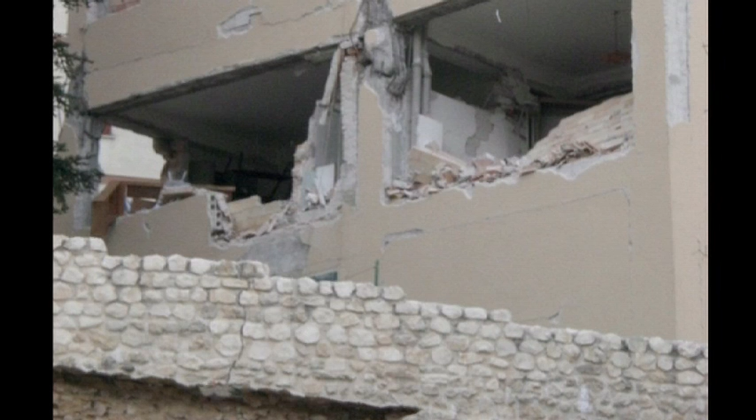Then, unfortunately, in 2009, my country—I didn't tell you, for some reason someone convinced the Queen to accept my citizenship application, so I became a Kiwi Italian now. My kids were born here, so I have two countries now. Italy, and this country, have both been affected within two years by severe earthquakes. The L'Aquila earthquake—someone may have heard of L'Aquila—was something that could help, and can still help, in understanding a lot of what happened here.

Just to give you a bit of analogy: we came back from that earthquake, and I decided to spend more time on it during my sabbatical year. We came back telling people there was something absolutely unusual—a main city, maybe this will ring a bell, déjà vu, a main city struck by an earthquake with its epicenter just underneath the cathedral. That gave a huge punch into the medieval center, with a vertical acceleration that was so high. Does that ring a bell?

And people said, it doesn't make any sense, we don't have vertical acceleration, we have an alpine fault far away, there's no way we can have vertical acceleration. And I'm sorry for your country, we understand, but you're dealing with structures over there which are old unreinforced masonry, very vulnerable. And I would say, yes, but that's not correct.

We do have in Italy many reinforced concrete buildings which are similar to the ones in Turkey, or similar to the ones in the US, Japan, California - in California they think there are more than the US, Canada, South America, and New Zealand. For how good New Zealand was in 1960, 70, 80, 90 in earthquake engineering, I'm going to show you that this is nothing different.

And now, unfortunately, we had the confirmation. So 2010 came, September the 4th, and that was bad news, and that was good news. That was half a story of success. It was half a wake-up call.

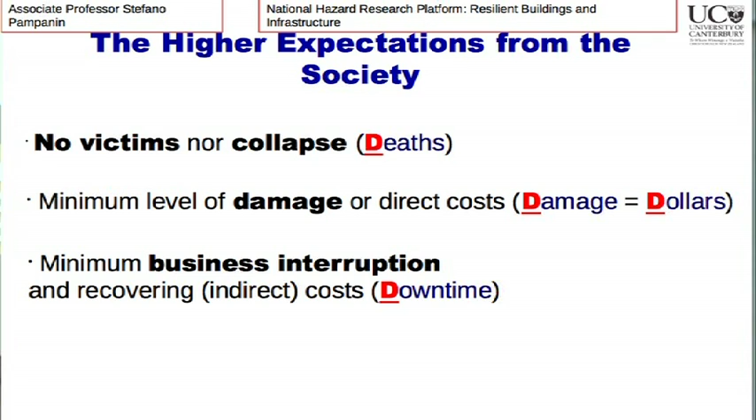But then you're asking for something more - you're asking to have basically no business interruption. And everyone thinks that in a modern country like New Zealand, we should be able to give that to the population. So how come that in best international practice and current best codes in the world - New Zealand is among the top 4, which are US, Europe, Japan, and New Zealand, considered the 4 best codes in the world for earthquake engineering?

Now let me tell you something that probably no one has actually communicated to you - the truth. The truth is, in international code, there's a sort of implied agreement with society, with you people. You were part of that agreement somehow, and I will try to explain how. When you get a big earthquake - and this is the big one, frequent earthquake - it's going to happen every 43 years.

So basically it's going to happen. It's a probability, but it's a small type of shaking that you're going to feel in Wellington any time, sometimes over here from Milford Sound. You would like to have a green tag.

We're going to disclose this magic thing of the green tag. The green tag means, basically, with a moderate earthquake, you're expecting a fully operational building, so you're able to go back to your building without too much trouble, keep on working.

As soon as the earthquake becomes a little bit bigger - something which is going to happen with less frequency or less probability - then you're going to have a little bit of trouble. Some damage, still operational, so you're still able for a few days out of your office, out of your house - this is a yellow type of damage.

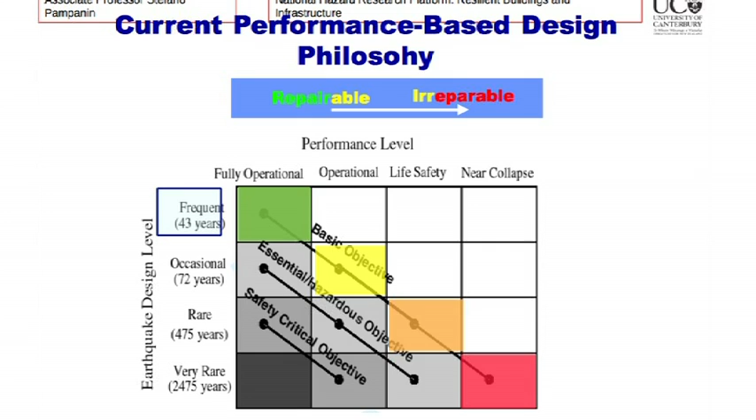So now you understand tagging, and that under a decent earthquake, the level of protection the code gives you is repairable yellow, irreparable heavy yellow - basically a not-repairable building under a severe level of shaking, which was mostly between September and February. That's the reality of facts, unless we do something else.

Now, the fallacy: the code is not a target, the code is not the goal. We must not accept someone proposing the minimum standard, like when you're shopping around for anything else. You must know about better performance, new products, what is available - and today we're going to tell you something which can do much better. The code is actually minimum by law. If you go lower than that, you're illegal. So why are we accepting just that level up, the legality, can you say that? Or why don't we just do a little bit better and ask for a much higher level of performance?

Now, the bad news, or the truth, is that by definition, what all of us thought about being earthquake-proof doesn't mean earthquake-proof. What you thought was an earthquake-designed structure - one where you could have a nice shaking, go check whether the magnitude caused liquefaction or not, come back to your house and be safe - doesn't exist.

Sorry, or it does exist, but it's not what you bought. What you bought is something which is earthquake-proof enough not to collapse, but to be severely damaged such that it's irreparable. This is unfortunately the truth, provided that you're going to stay on the minimum required by law.

No one is telling you that you can't raise the bar. We're going to discuss that.

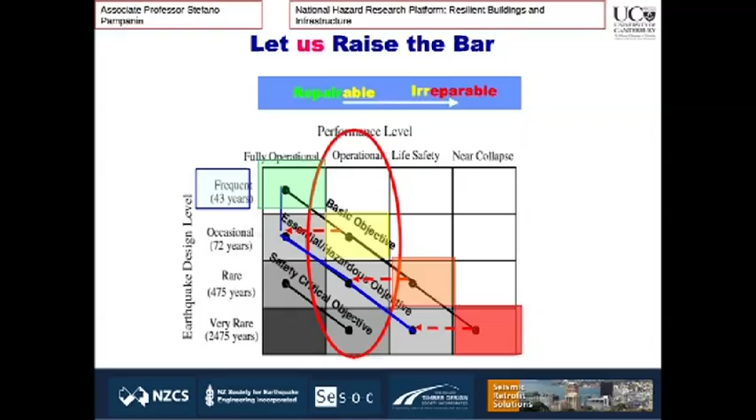Basically, it's shifting. Instead of being down here, up there, we are actually coming with a level which is a little bit better, and you can change that level.

You can ask someone, sorry, I like that car, but how much does it cost to just get a better one? And they're going to tell you, oh, you got me, actually I was trying to give you the old stock that I had, and now that you caught me, there's actually better technology that I have to sell you for 30% discount.

So this is something that does happen, and we're going to discuss how building technology has changed and how it was in the past. So just believe us when we tell you that the famous 1970 is a milestone, is actually a threshold in changes in the way of designing buildings. And that was 1970, ages ago, so something of the same nature should have happened.

That type of revolution happened in the 1960s, 1970s, and it did happen at Canterbury University. It did happen in New Zealand. New Zealand was leading the world, telling that if you have a chain, and basically a building is a chain, you are going to have, by definition, a weak link. There's going to be something that the earthquake is going to find.

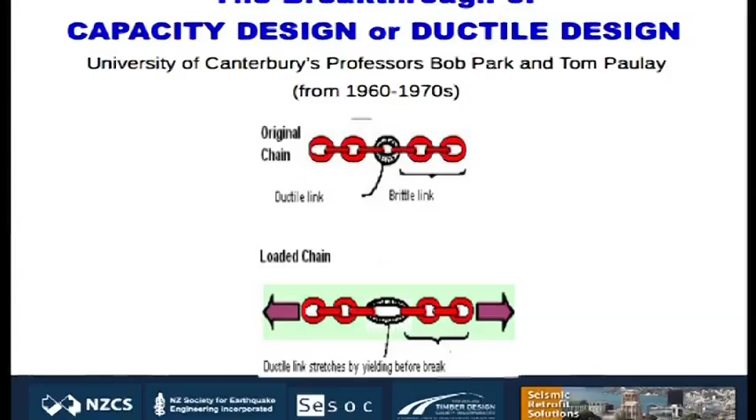That's part of the nature of finding minimum energy to just go through. So there is something in our body that is a weak link. If we can make that weak link ductile instead of brittle... my weak link, I have ankles and knees, very, very brittle. I broke them so many times. So when I was going to the doctor, I was asking, can you please put a ductile ankle? What the heck are you talking about?

I would like to have something which is replaceable. As soon as I knock it in, my swelling is going to disappear immediately, and I'm going to have a replaceable ankle. Can you provide it to us? So the point is that if we could make the weakest link ductile, this is going to at least preserve us from fracture.

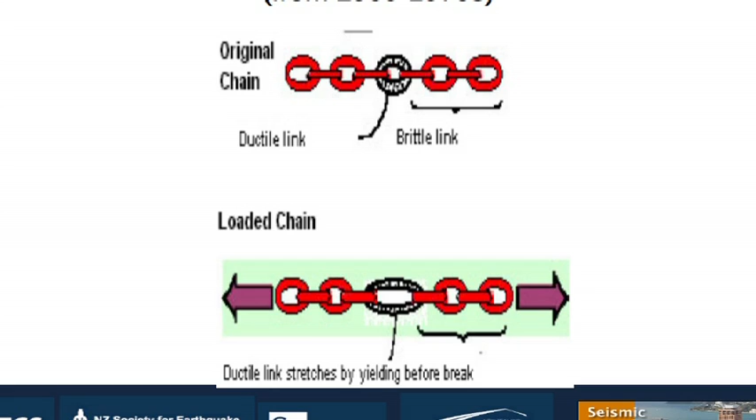And that was the revolution in 1970 in New Zealand, where Professor Park and Paulay suggested that we design the weak link to be where we want. I would like to have the weak link over here, and I'm going to work hard to make the connection between the two elements as ductile as possible, something which can stretch nicely without breaking in a brittle manner.

So the novelty was ductility versus brittleness, and everyone understands brittleness. Glass is hard. If you go over the strength, you're going to fail in a brittle manner. It doesn't matter how hard it is. There's always going to be, by definition, a bigger earthquake than what we thought, and that unfortunately happened.

That's why disasters happened, because there's always going to be something we did not know. So the best way of protecting us from the unknown is to have a backup plan, which gives us the possibility to go further instead of collapsing under a bigger than expected earthquake. This is what's been taught in the world since the 1960s-70s, called capacity design, which means if you do not decide to have a ductile mechanism, this is going to be your ankle breaking up over here, breaking up over there, which causes columns breaking badly and causes a collapse. This was the design philosophy until the 1970s.

So anything designed before that was very prone, and is still very prone, to this type of collapse. We've seen these collapses everywhere in the world. The new revolutionary way in 1960-1970, which entered building codes around the world in the mid-70s, was to place ductility where we wanted, such that our building can actually sway quite nicely without collapsing.

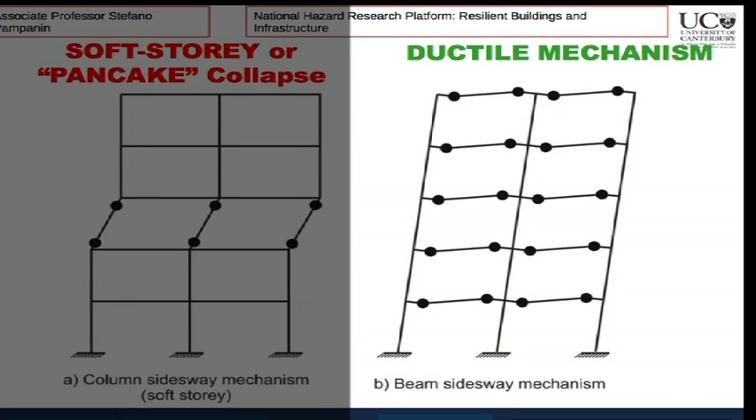How can you spot it? If you see something with strong legs and small beams, good, approximately. If you see something with slender legs and a big body on top, that's basically this type of configuration, and it's a problem.

It's not that complicated, but imagine that in the 1950s-60s, the best engineers did not know enough to understand this type of situation. So at that time, they were doing their best up to what they knew. And this example shows the issue of design standards in the world and in New Zealand.

New Zealand was very good at improving and promoting new design standards every 10 years. Just imagine, from a revolutionary approach able to preserve a building from collapsing suddenly, then from there on, every 10 years, 1982, 1995, 2006, and now there's going to be a new code, things have been dramatically improved.

What does it mean? Just imagine how much we would smile looking at Formula One. Obviously I'm biased, so I think Ferrari is still the best car in the world. The 1960 Ferrari was absolutely fascinating, wasn't it? It was the best car, the fastest one. In the 1970s, wow, the evolution in 10 years was unbelievable. 1980, unbelievable. Now in 2011, looking back at those 1960s and 70s, we are smiling. They did not know. Look at that. They were still using...

Think about our cars - can you believe it, they did not know about seat belts or proper braking. Imagine what that means in terms of technology over 10, 20, 30 years of evolution. Believe us, if codes have changed every 10 years in New Zealand, you're having a major improvement. In 50 years from now, people will look back thinking, can you believe it, they didn't know that they'd be looking at our 2010 technology like an older type of technology.

You can recognize the building - I prefer not to mention it, but it's quite clear. I've been giving lectures around the world about precast concrete, and I still use this building to show how fantastic this technology was for precast concrete.

This technology gave you the possibility of going through an earthquake, which I'm going to show you how bad it was from an engineering point of view. And it did do the job it was meant to do - it developed these famous plastic hinges, a fuse within the body good enough that the building did not collapse and just needs to be repaired.

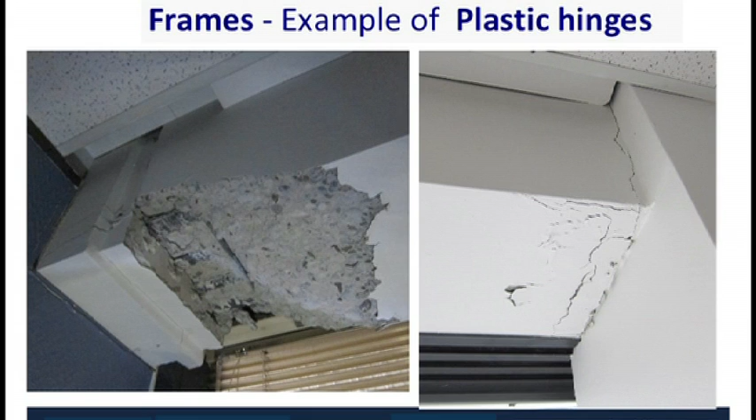If you consider that this earthquake was much stronger than what the building was designed for in 1980, this building did brilliantly. But there was a gap of communication - people did not understand, were not told, because you basically agreed that code means minimum standard and nothing else. So it did the job.

If you see what type of damage we get in a laboratory, this is nothing. This is absolutely okay - apart from some minor structural detailing I don't want to go into, in principle this is not a massive level of damage. Can it be repaired? Absolutely yes.

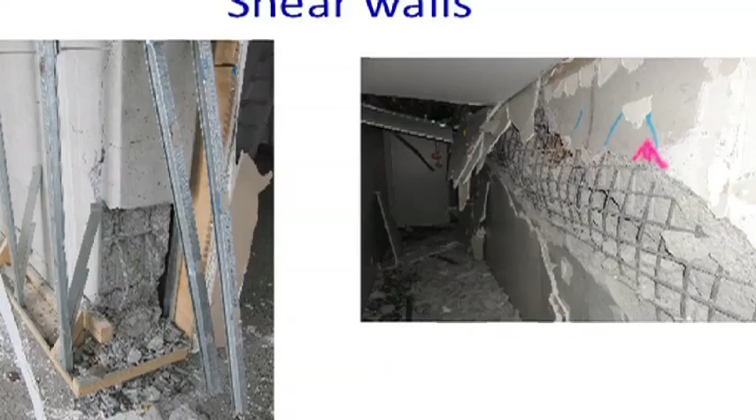Unfortunately, you have an insurance which gives you a full replacement. So what's the option - having a scratch on your car and being bothered going to the panel beater, or getting a new car? Get a new car. Back in Italy, we don't have that insurance, so we rely on the government, blaming them for not coming down with billions of dollars to repair our cars. They say we can't afford it, so I take the repair - I can go with the panel beater.

So these things that have happened are actually the way of dissipating energy through the fuse, avoiding the collapse as prepared.

I'm very happy we have someone from the press here today - because please, don't use magnitude anymore. Nonsense - I can take magnitude 9 in Milford Sound, and that's going to do not much. In Christchurch CBD, I can take magnitude 6 - I shouldn't say today, under our feet, not good luck, okay - but that's going to probably affect us more. The building counts the shaking it feels, not the magnitude.

So there's a way of communicating science which is important and fundamental. That's why we're proud and pleased to have the opportunity to talk to you, because you are going to be the ones making the revolution, not us. We're going to provide you the tools, but you need to be convinced the revolution can be made.

And so if you're being pushed up, you can imagine the building gets pushed up. Think in a different way. If you're skiing, that's the best example I can give. There's a lot of learning about vertical acceleration, which is a learning for the world, not only for us. If you're skiing and suddenly you go through a bump, you don't have time to jump. You go through the bump, your legs come up into your body, and you feel burning in your legs.

So you get the axial load on your legs before you have time to release and jump, right? That's what happened to the buildings. They got a bump. They were not skiing, they were just standing, and the piece came underneath, and they got pushed so heavily underneath that basically, suddenly...

Imagine more than 1G means - I'm quite a good unit for my students because I'm 100 kg. So I'm the unit. 100 kg is a unit. 100 kg in a square meter is a unit, 1 kPa. So it's quite simple for my students to remember how much is 1 kilopascal and 100 kg.

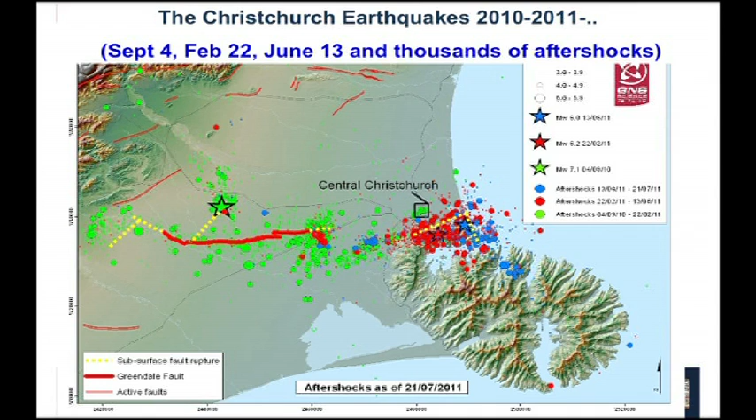I'm not going to break my ankle, but I'm going to sway it so much that if I'm not designed properly, I might collapse. But if I'm designed properly, I will not collapse, okay?

Now, the code is written in such a way. There's a nice curve, a fantastic mathematical equation, calibrated under thousands and thousands of records around the world. It's an envelope. There have been thousands of records around the world, starting in 1940 with the famous earthquake in El Centro, United States, where after that first record people have been plotting many of these graphs and taking an average. You understand where I'm going?

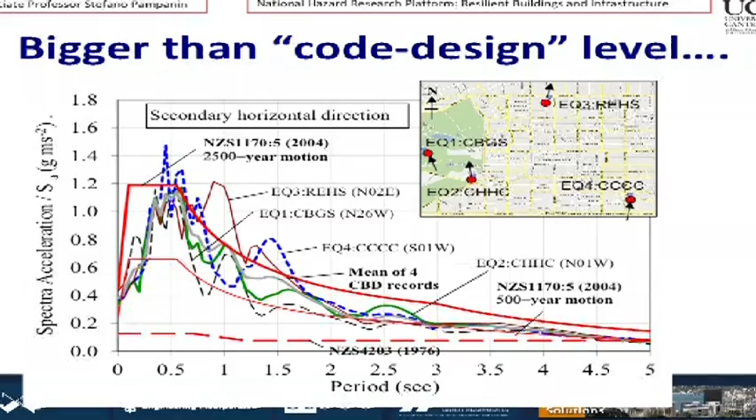Now that you know about that, you're going to wonder, hold on. Let me say it a different way. This is the 500 years earthquake. This is what you design for big damage, yellow to red, okay? You see that? This is where we are in the code. This is a 2004 design for big damage, irreparable.

Look at the earthquakes in the CBD. This is Hagley Park, where there are four recording stations, and that's what the building felt. That's what the building felt: 2 to 2.5, 3 times what was written in the code.

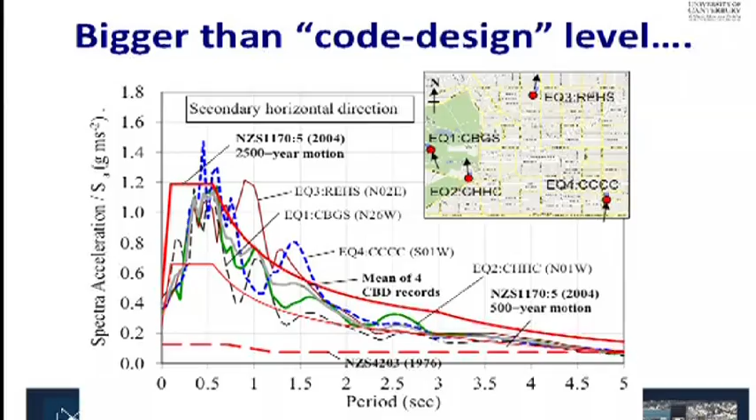Now, having said that, remember that for a new building you would expect for this type of earthquake very severe damage. And for this level up here, the famous 2,500 years, you would expect almost collapse. Are you surprised at what you've seen in town?

So the question is changing, and your brain starts changing in a different way. You're taking a 1960 car, 1970 car, 1980 car, and now you understand how much they were behind what we are doing today. You try to make a crash test, comparing the 1960, 70, 80, 90 car with, they say, the Volvo—not the Ferrari unfortunately—the most safe car under a crash test.

Okay, let's suppose that's the best target. You're having a crash test, but the difference is the crash test must be made at twice the speed of what you typically run it, because the earthquake was twice the speed. Would you be surprised to see big troubles in the old cars? No. You would actually say, how come, how lucky we were that not more of those cars could not preserve the lives of the pilot, wouldn't we?

And internationally, that's exactly what statistically has happened under such a severe level of shaking. The statistics would have suggested and predicted that Christchurch would have been flattened down, much more than what actually happened.

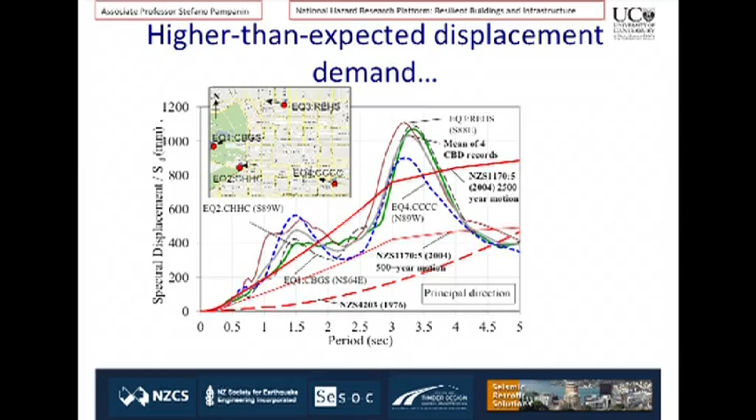So, having said that, let's move one step higher. This is displacement now, not acceleration anymore. We said tall buildings are going to be subjected to bigger displacement, but they're going to have less acceleration, that's good. But big displacement needs to be controlled.

That bump comes from different soil conditions, the fact that we are in a basin area, the fact that the earthquake is not going to fall exactly as expected, but just imagine the demand over there. Again, here's the code for 500 years. This is the displacement that a tower in the city center, any tall building, was expected to have—let's say 400 millimeters—and it became 1 meter.

Now, only if you're using the best technology, one of the best from yesterday, can you take it. If your building was designed according to something which was not able to give you that ductility, you cannot take it. So the message is straightforward: something so severely bigger than the best design we would do today obviously could have, should have, and did collapse or fail buildings which were not designed at that level.

One of the best quotes we've been using in earthquake engineering is from the late Professor Tom Paulay, and he taught the world that the earthquake does not read the code.

And however obvious it looks, the consequences of understanding that are huge in social terms, in terms of you not accepting anyone to sell you the minimum standard. You'll know that the next big earthquake, whenever it happens, won't respect the code. We'll have lows, highs, bumps, and those lows will not be there.

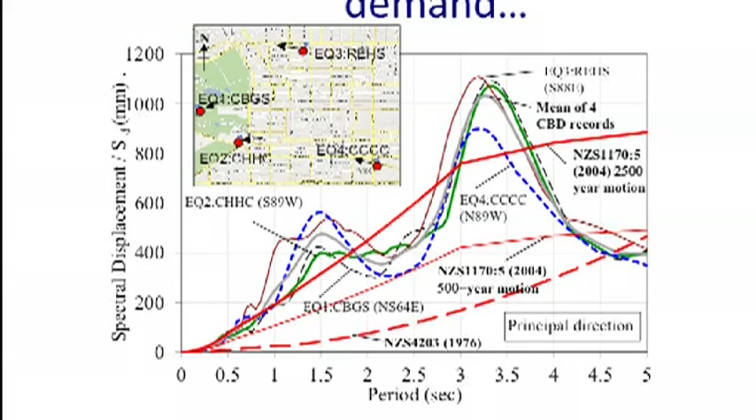The code will be respected in only one situation, which is something nice we like about talking to the seismologist. Over a decent window of time, not 50 years but 10,000 or 100,000 years, the whole amount of shaking the Canterbury region is going to be subjected to will probably fit that curve. That curve is a fantastic envelope for the seismology window, not the lifetime window.

Now that you understand that, your brain is going to change. Your way of discussing and asking for things is going to be dramatically different. That big building, that earthquake, did not read the code — it came with big bumps and lows. Even the lows were bigger than the 500-year design, so it was bad news no matter what type of building you were looking at.

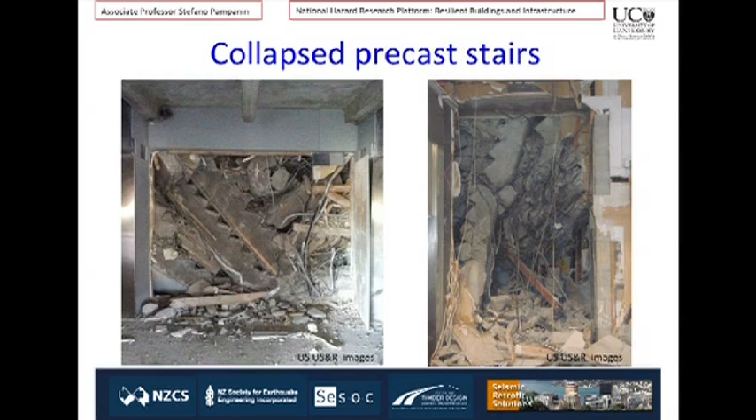Stairs collapsed, and that's something the world is now wondering about, because the design provisions for stairs in New Zealand aren't any different from what people are doing around the world. So there's now a quite severe problem globally of what can we do.

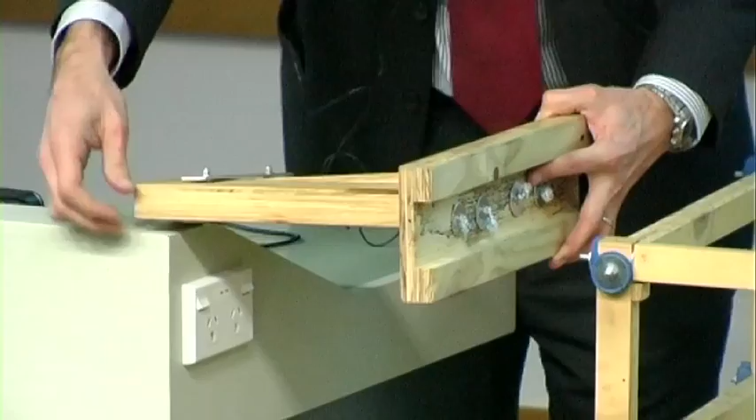And now it's quite clear — those stairs, in principle, seem quite simple, nothing else than elements sitting on top of the landing here and there, and the length of the seating, because of economy, can't be that much. How much displacement do you think the earthquake is going to push you for? You saw that displacement, how much it's going to push you. Take a coefficient of safety, think about the worst, and you get a certain number.

That was in 1980, knowing what people knew then about response of buildings. The same approach happens today, but now we know more about building response because there are different ways of doing laboratory testing and computer modeling, which I'll show you. So already by 2010, the prescriptions for how much a stair sits on the landing are bigger than what was done 30 years ago.

Makes sense. Still, the earthquake did not read the code — it came with displacement 2-3 times bigger than what was there, eating up all the coefficient of safety, and those stairs collapsed.

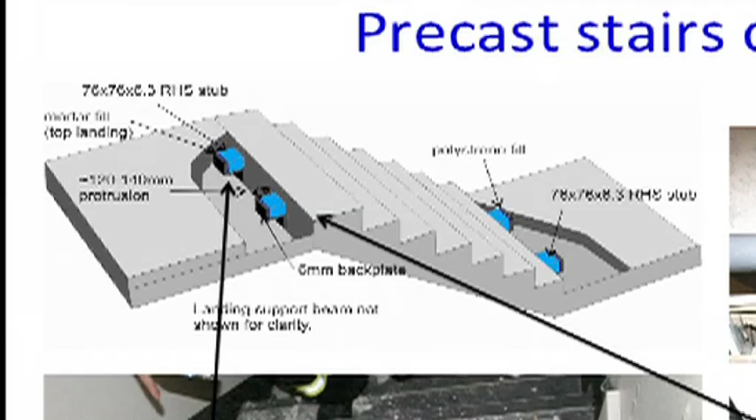Now here's something that's going to be, from a technical and social point of view, a revolution, and I'm personally pushing a lot for it. We're discussing again about building redundancy within a building. Redundancy means — let me tell you with a strong Italian accent — how much did you come out with? Make it like that. But that's not enough. It's still the same principle. After you make it like that, then give me a backup plan.

Should the stairs unseat, I want a backup plan, a catching frame. And I don't trust it — I want a third backup plan. I want a hanger that will hang my stairs onto something such that whatever happens, they're going to unseat, they're going to sit on a catch frame, the catch frame will not hold on, and they'll have a third backup plan.

Redundancy is going to be the new old way — it was the old way of designing structures. And this is going to be the message: stairs, if we can do something useful for society, will become the safest place you want to be, not the worst place you want to be during an earthquake. Wouldn't you expect that? The stairs being the place where you go and think, oh great, now I'm safe. How's it going?

Still moving. So we can do that — that's the point, we can do that. If you design the stair, and I'll give you an example so you understand what we're talking about, as a decoupled structure, disconnected from the mass of the floor, the stair becomes a self-standing structure with walls holding the stair only.

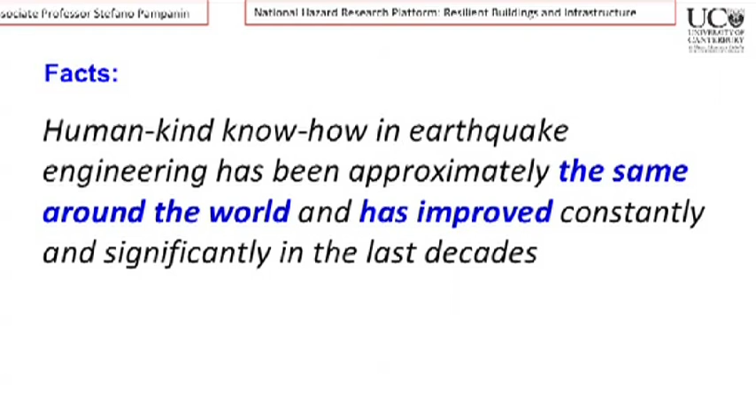A lot of things changed since 1994, not only since 1970. And then Europe got a massive problem in 1999. That problem was confirmed again by many, many earthquakes around the world.

From an engineer's point of view, which is what you're now becoming - you're going to receive ad honorem certification for this course - you see through. You don't see that building, you see the skeleton, the X-ray. You don't see my body - you're now going to see if my knee or my ankle are strong enough.

You see through, you start thinking the bone is good enough to take that loading. The legs are far enough apart to take the lateral loading. That's how we see things. And once you see through the skeleton - ooh, there are troubles over here.

Look here - the columns are bigger than the beams at this level, but as soon as you go up, the beams become bigger than the columns because it was mainly designed for gravity. So the columns become smaller and smaller going up the elevation, thinner and thinner, and you're going to get a pancake effect, not at the bottom, but typically at mid-height, on the top.

Plenty of earthquakes around the world showed a pancake collapse mechanism that caused a progressive collapse starting from the top, not from the bottom. These things are well known to be problems of pre-1970 design.

As we understand now, after the revolutionary design happened in 1970, it was like a 1976 or 1980 Ferrari - still far away from what we can do today. So no surprise that after a revolution happens, that revolution is still a past revolution. Something else has happened, and we need to do better.

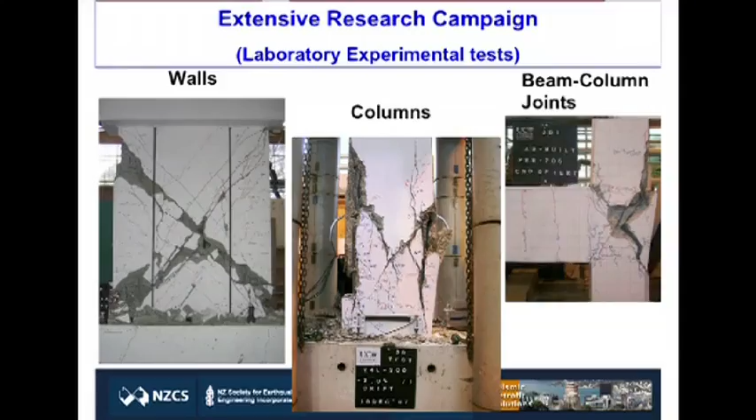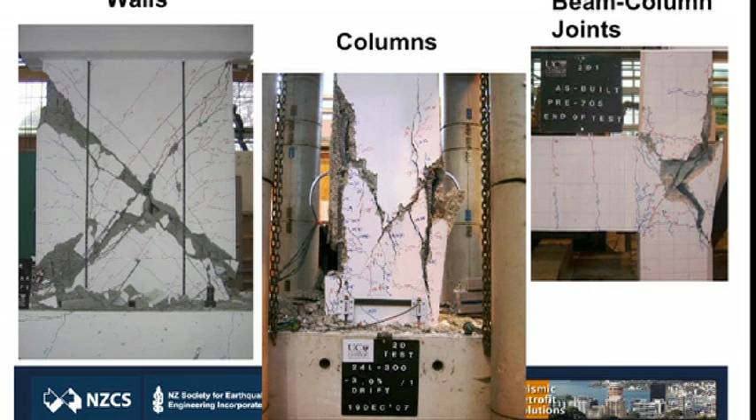The good news: this has been tested in the lab way, way before the earthquakes. These are walls according to New Zealand practice, old practice, and international practice - same thing. These are columns tested in the laboratory.

In 2007, interestingly, people said, 'oh, you were testing before the earthquake.' Yes, as a community we did not start on earthquake engineering just after September 4th. There was enough information in the world for at least a century - I'll show you there's actually much more than that to work with.

Now, the bad news is all these tests followed the principle that humankind had the same know-how in the 1950s, 60s, 70s, and 80s. We were testing New Zealand practice because people didn't believe - let me say it nicely - that Turkey and Italy, those 'corrupted' countries, don't do it like that. So they're bad, but we're doing much better, people said. And we were saying, no, you have the same know-how.

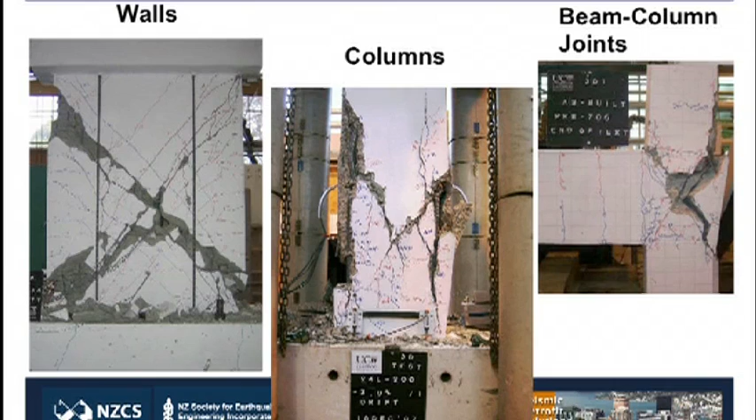So basically, look at it - all tested in the lab. Beam column joint - the knee, the ankle in a wall.

Testing, let me go back.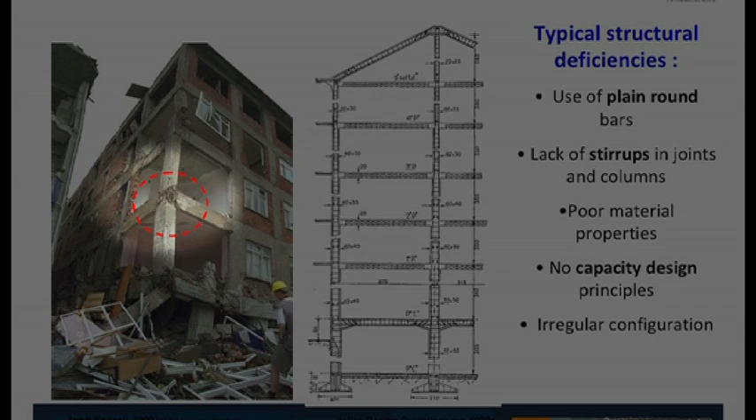You see this corner joint? It's the weakest possible point of a building, because you're pushing very hard, and in the corner you're really stressing a lot. The knee is going to be subjected to a big deformation.

Look at that, and look at what we are able to do in the laboratory. We are basically able to reproduce the same level of stress. So in the laboratory now, not 20 years ago, we are able to reproduce what the earthquake is giving to us, which means we are able to design against it.

20 years ago, we were not able to reproduce in the laboratory what was happening, so it was hard to put in the code provisions to go about that, against that.

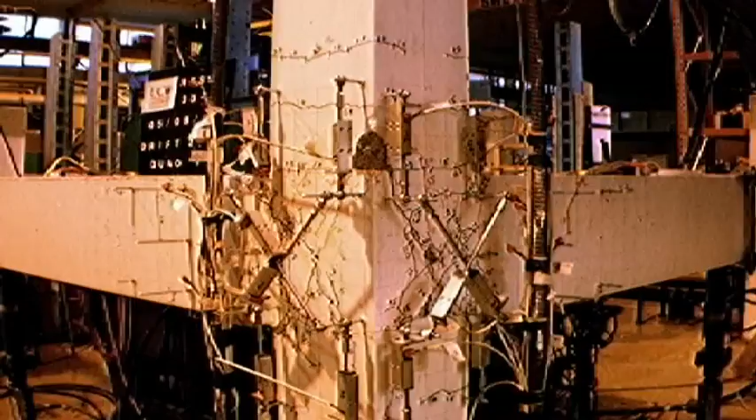This video is already the second phase of the test. It's a small quasi-static test, so we're moving slowly, simulating the earthquake, and this has been reproduced at higher speed, and we're getting what the earthquake was giving to us, but we're moving in a slow motion. So we're able in the lab to reproduce things.

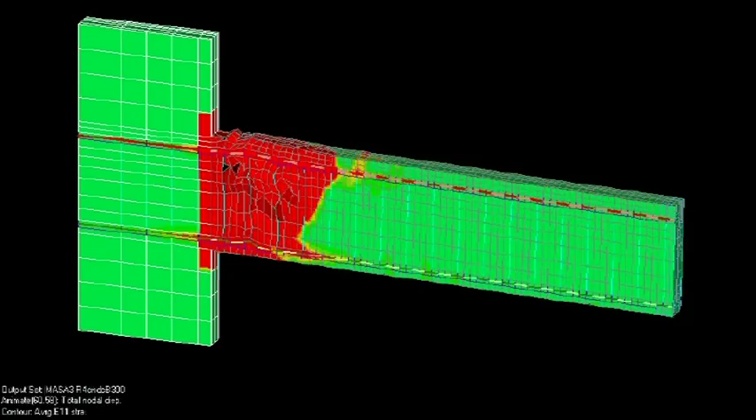We're able to do also numerical modeling. The plastic hinge, the famous plastic hinge, that's what happened. We are able to simulate in very sophisticated computer modeling that type of behavior.

This type of modeling was not available in 1980, not on a computer that everyone was able to use. So you can imagine how much has happened since that breakthrough in 1970, 1980, and so forth, just because of capability of testing. Let me show you something bigger.

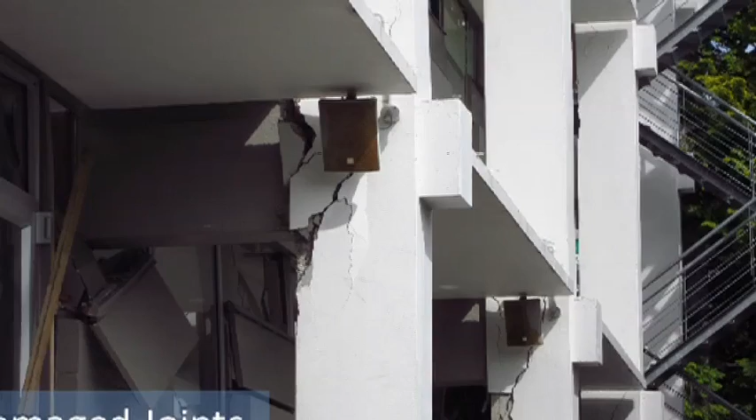We've been doing things in the lab, from the laboratory to the biggest test ever happened in open air. The laboratory we have is something unique — all generations of structure, all generations of material being tested at the same time so severely. So there is information which the whole world is now trying to understand.

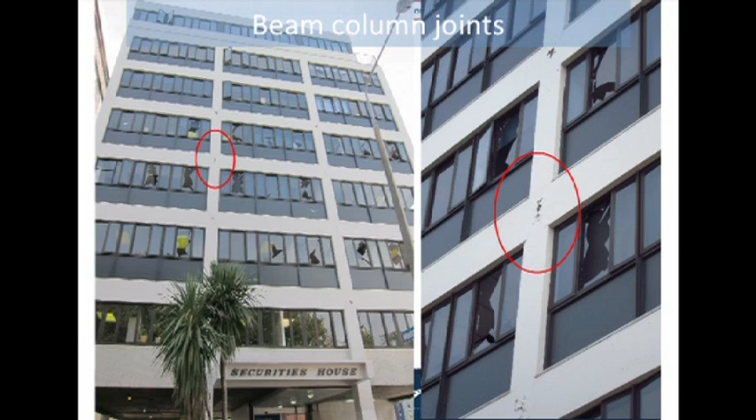Unfortunately, most of them are not new, are not novel. Have you seen what we've tested in the lab? It was all part of, I was using different slides in my course, using different types of earthquakes in the world, and they were not novel.

That's not good news, because it means that New Zealand had the possibility of learning it and implementing it. Why did it not happen? Because we want to have the cheap solution no matter what, and because we don't think the Alpine fault will ever happen, and if it does happen, we're not going to be affected.

Vertical acceleration punched through very heavily, and that gave a lot of troubles which were unexpected. So there are a lot of new lessons, unfortunately, learned from this earthquake.

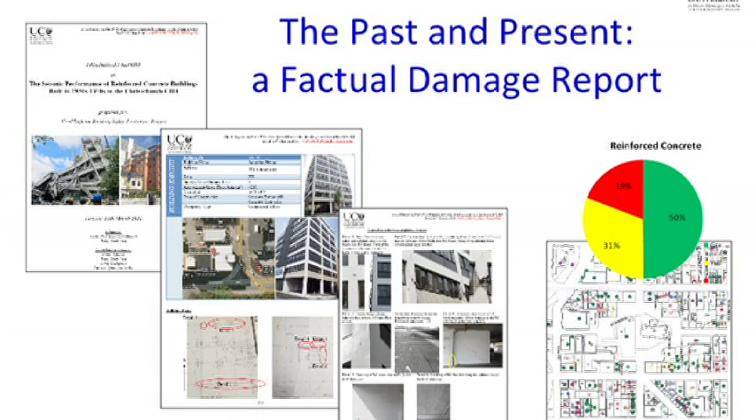What we've been working on is preparing a report showing all the buildings that we've been entering, basically more than 100 damaged, with different ratings — red, yellow, green. Obviously you don't enter green buildings; if it's green, there's not too much damage. You need to inspect the damage to try to understand something.

So we were entering the yellow and red buildings for the pleasure of my wife, who was telling me, are you sure? Luckily, she's an earthquake engineer too. And my father, who's an engineer too, was telling me, I understand that you have to do it, so go for it. And my mom said, I don't understand it, why you have to do it.

At least we see that this is valuable, and I can tell you it was quite a pleasure after a few weeks to remember that, as an Italian, you like to put on a jacket and a tie. So I did remember that we had a jacket and a tie, not only hard hats and everything like that.

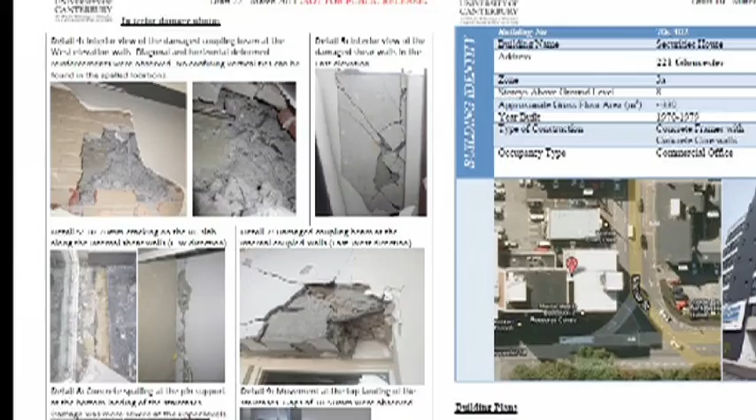But this information is becoming of fundamental use for the highest decision making. Only if you guys that are aware of it are going to ask for some changes.

Now, can we fix these existing buildings? First of all, can we fix them? The answer is possibly yes. If you ask, it can be done.

I received a phone call, quite interesting, from a journalist asking, we know that you're holding a secret, confidential report on the vulnerability of existing buildings in New Zealand. I said, yeah — www.retrofitsolutions.org.nz. It's so secret that it's been on the web for years, since 2004, and has been funded by the government.

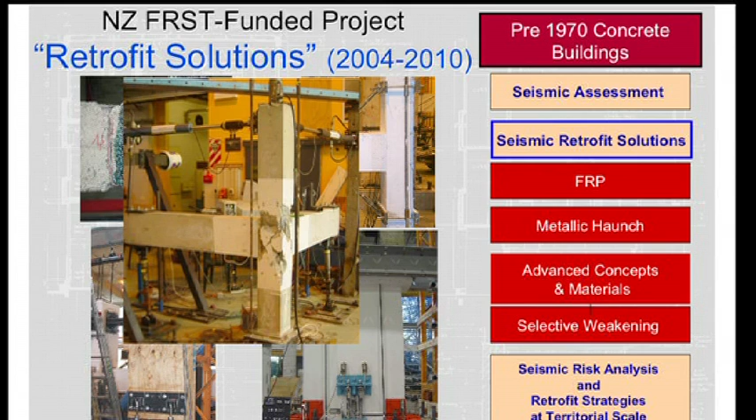The Foundation for Research, Science and Technology funded a project called Retrofit Solutions. It was not called 'please check whether it is really true that our buildings are vulnerable,' it was 'please check how we can fix them.' Did you know that? No. You know why? Because once something is in the public domain, there's basically no value.

I can prove it, because as soon as we prepared a report and marked it 'not for public, highly confidential,' it went to the highest level within half an hour. I don't understand how that could have been possible, but we got to the point of talking to the highest people. The problem was that because it was not for public use, you did not know it. Now that you do know it, and approximately understand what the higher decision makers know...

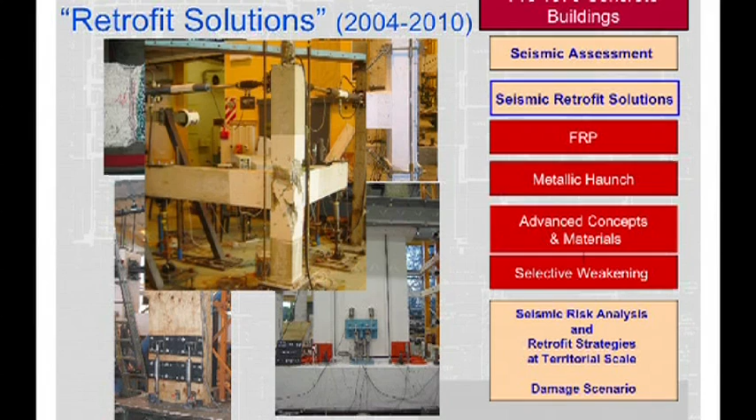Another type of solution, including walls - look at this material here, made of different things. I'm going to discuss a little bit later about what can be done.

Now, who told you that strengthening is the way to retrofit? I'll give you an example. If you have a problem with your knee, and the connection of your tendon is not properly done, your doctor might suggest cutting your tendon. This happened to me - I said no, I don't like it, you don't cut my tendon. What if you're not able to reattach it? He said that's the procedure, but I didn't like it, so I didn't do it, didn't fix it. But now I understand what he meant.

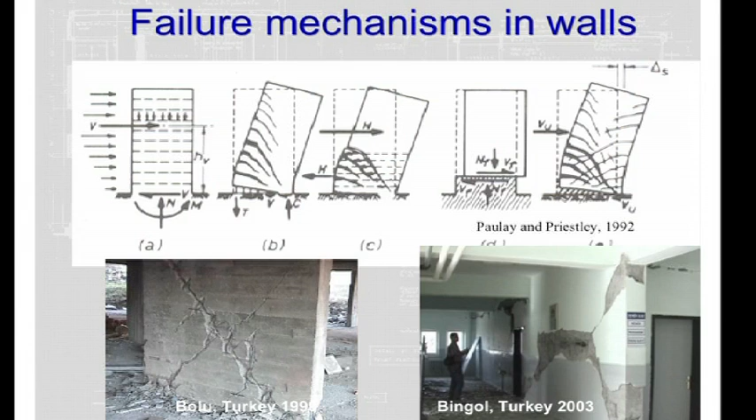It meant that for seismic retrofit, you don't need to increase the strength. This is what you've seen, haven't you? Typically it's Turkey - now unfortunately we can use New Zealand too. This is what you can do.

Saw cutting - cut the base, cut along the height, so that massive wall, which is going to try to break in shear or lift up from the foundation, gets cut at the base instead. These are typical interventions done in marble blocks in monumental structures.

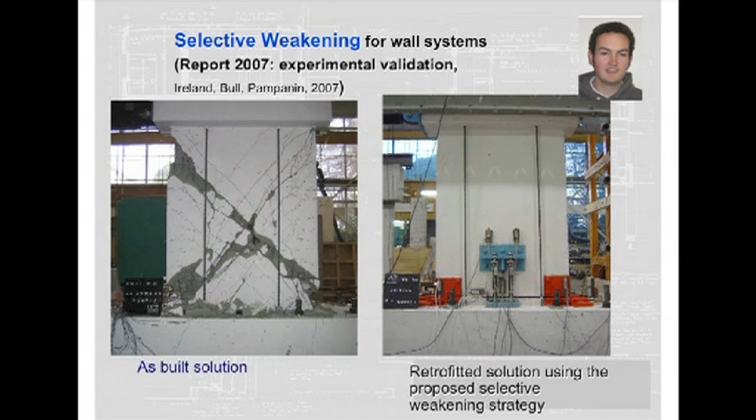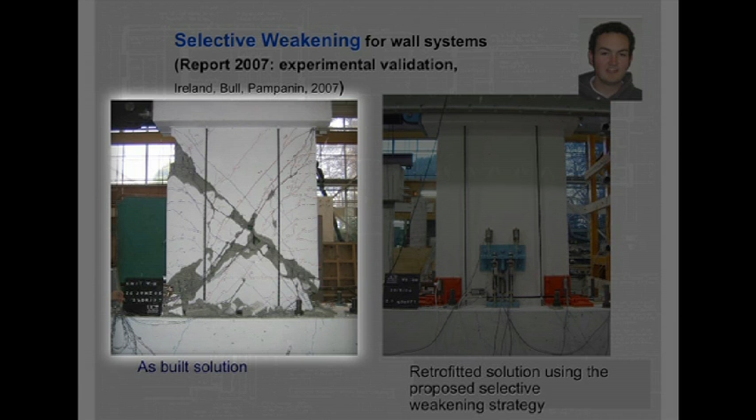Now, people told me, sorry, you're missing a slide - you should be showing after the test. That's after the test. This is the same old type of wall that can fail badly and dramatically because it wasn't designed to take lateral forces. Then you allow this wall to step up, move, and displace, and you add a little bit of protection - basically nothing more than bandages at the end, so the concrete will not push out. Done. This is the level of damage you'd get after fixing.

How much do you think that cost? Nothing. This is the number one solution, which is probably going to be adopted in the L'Aquila earthquake recovery. You already have a wall in your structure - use it before the damage, and make your structure behave in the best possible way that we can achieve today.

So don't let someone tell you retrofitting costs too much - that's true only if you're using the 1980s way of doing retrofit. This has been developed in the last 5 years. The better news is that progress hasn't only been made in strengthening and bandaging, but also in medicine and surgical intervention - from the medical point of view it's the same concept. As structural engineers, our patients aren't bodies, but structures.

So with new technology, now you believe us, I'm quite sure you do - you're going to tell someone, why are you using the same old way, the best old way? Now you can use the best new way, because things have improved. So let's see how much.

To see how new the best way is, let me tell you a story. Before becoming an engineer, my father was an engineer, and I wanted to be like my father. He tried hard to tell me that I should have done something else in my life. And the more he told me, the more I took up the challenge, saying I'm going to do it. Eventually, this is something I will not be doing with my son - I will do the same, the other way around, telling him that he must be an engineer.

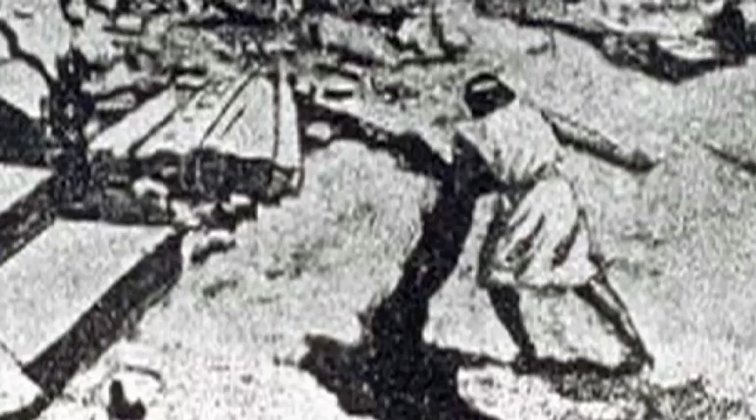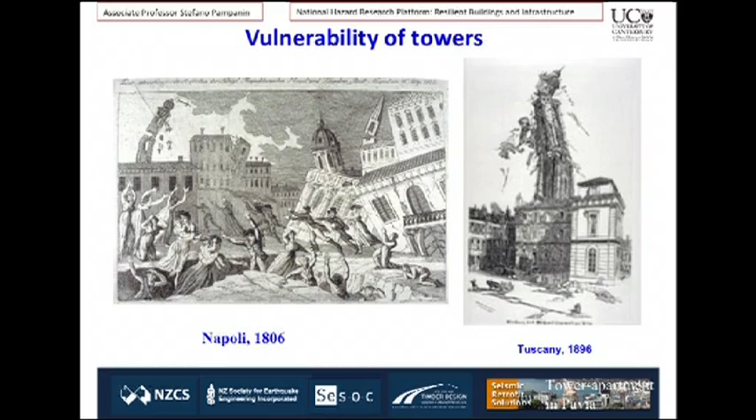And you see the dramatic solutions. Bell towers are actually falling apart. Liquefaction does happen, more dramatic than what we think. Tilting of elements has happened for ages, so there's nothing absolutely new in that. There's a good way of taking towers when they're falling apart and replacing them with new apartments. That's Pavia, my city - it was called the city of the 100 towers, medieval towers. It's not a seismic area, but a few of them came down because of age.

And the best way of refurbishing those towers, which were 3 times as tall, is actually to make it an apartment. And you can bet that the one who did it is not an engineer, nor an engineering academic owning that - he's a lawyer. Are there any lawyers here? That was supposed to be my path that my father was suggesting me to go.

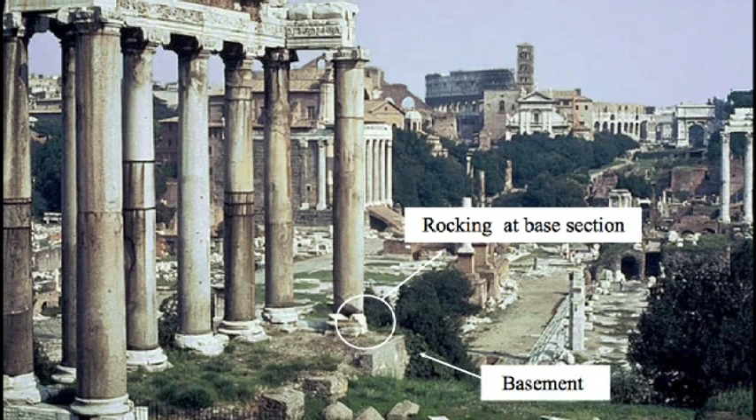The Romans picked up the theory and understood it. They made a little bit of a small, slender type of construction - these are the Fori Romani in Rome. The rocking mechanism was happening at the basement and underneath the capital. They were able to sustain earthquake loading, and that's what you can see in this one of the most beautiful preserved Doric temples in the ancient Agora in Athens.

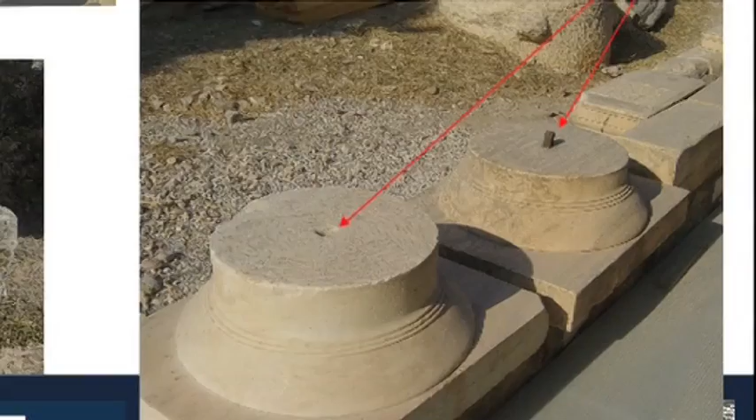And the concept of earthquake resistance is so simple, it almost looks incredible. It took them centuries to develop it - blocks on top of blocks, that's the big mass of the temple. It shakes back and forth, and the temple does nothing else than this type of movement without breaking. Those blocks had lead cast into the core so that when you do this motion, you could slide; to prevent the sliding from happening, they cast lead inside. During the First and Second World War, people went there to pick up the lead for military purposes, but that was basically the shear key.

Look at this - new 1990 to 2000 type of technology for bridges in the United States, Olympia, where the Olympic Games come from. I like to call it the bridge of knowledge. We are just copying - it would be brilliant if we were able to copy from our ancestors and improve it, but very often we just start from scratch, because those poor fellows did not have computers, so forget about it.

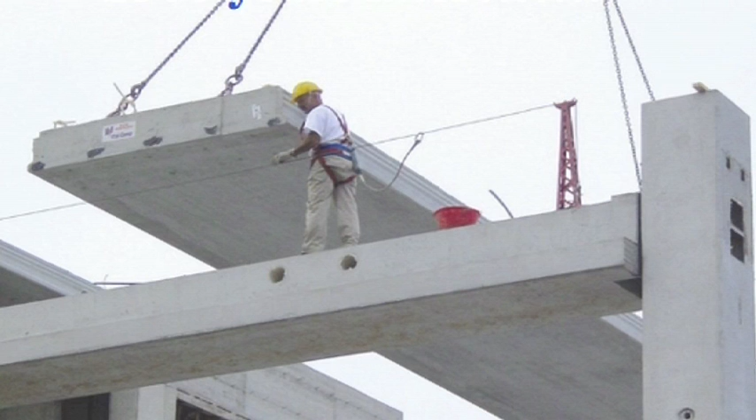And now we're rediscovering how brilliant minds they had and how we can improve it. 2,500 years later, and that's the novelty, that's what we're able to do. Same concept, these buildings are everywhere around the world. There is one building in Caledonia Street in Christchurch which has been designed using this improved technology.

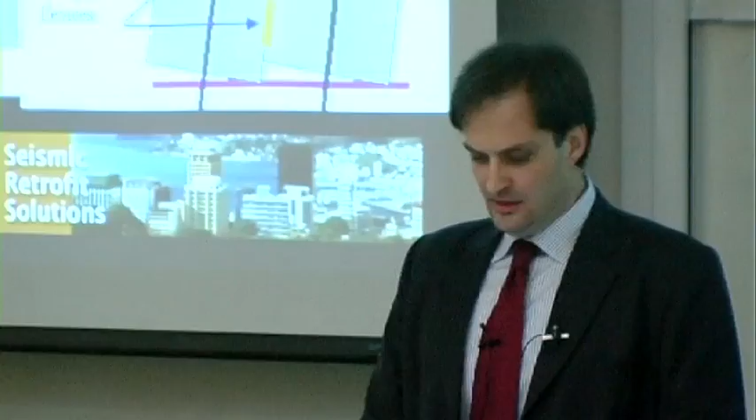We have two good news that we can provide. Key, we made base isolation, and all of you might know about that. Base isolation is basically putting your building on a skateboard and on rollers. The earthquake is shaking underneath, and you just stay almost in the right position. If you were making a frictionless roller with no friction at all, basically you would not even feel the earthquake. Can you see that?

In the future, please take it as a joke, but it's not a joke. I really believed when I thought that I can do something in earthquake engineering. In the future, the best way to not take the earthquake is going to be what? This way: the earthquake comes, you jump, and then you come down. How can you make it? You know how the Shinkansen train is running in Japan? They're basically using, let's say in a nice way, a magnetic field which allows you to be a little bit separated from the surface.

In the future, it's going to be possible to trigger an early warning, a few seconds. You're going to use not too much energy to just push the building up a little bit. A magnetic field can have a humongous power, and then you're sitting there down. Write it down, because I'm quite sure that if my son trying to please me is going to go for engineering, I'm going to hope that he's going to develop that.

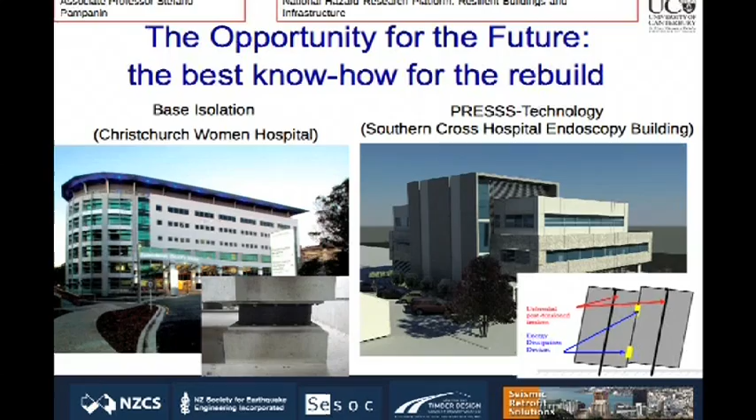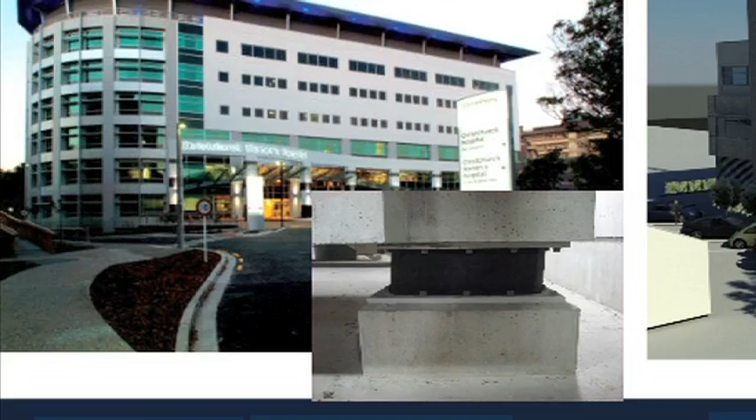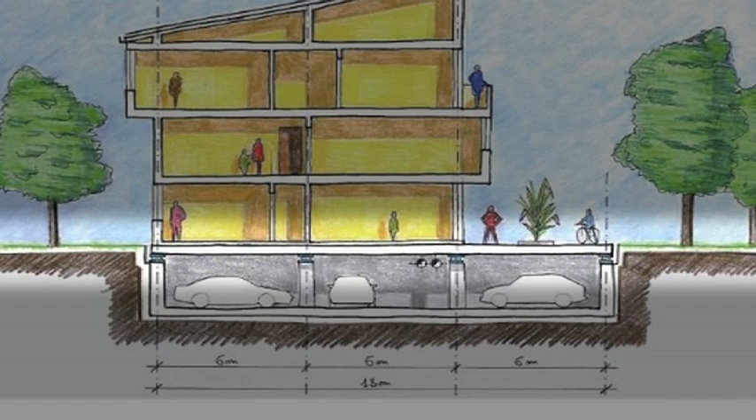Brand new means almost a passive house, best type of technology for insulation, best type of technology that you can use today. And they were using a basement underneath to have cars. What a brilliant idea, because as soon as you do that, what you're creating - let me explain it - is on top of the column you're having your rollers, your isolators. But you're saving the money of the base isolation by using the basement as a car parking.

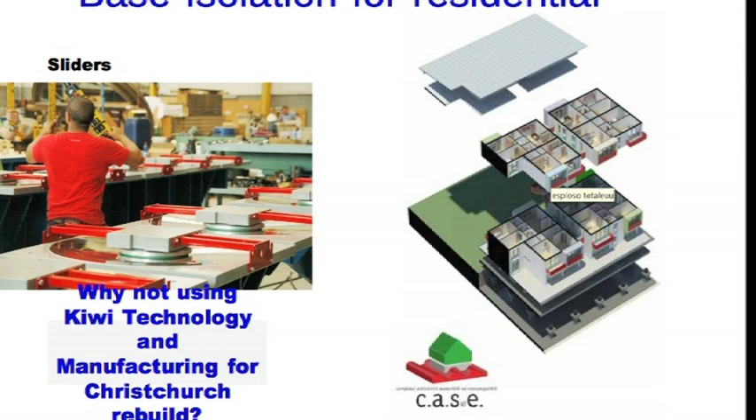And I think we would agree that car parking is an issue in any country, isn't it? And if a water table is a problem, engineers are going to solve that problem, it's not a big deal. So the cost of these houses on rollers, on sliders - different types of things - 20,000 people in 3 months from the earthquake in April. Between 3 months and 6 months, people were in these top houses, which are absolutely brilliant. And that's what they look like. Concrete, timber, steel were all on the top of a massive platform which was isolating the houses.

Can this be done for New Zealand? Of course. Why has it not been done? Because you people didn't know. Now that you do, you're going to ask, you know what, I wouldn't mind to have that type of solution, which I know doesn't cost too much. And it's going to be top-notch. It's not going to be a temporary accommodation, it's going to be a brand-new top safety type of thing. On top of the big platform, you can have any type of material you wish - any type of concrete, timber, or steel. How does this technology work?

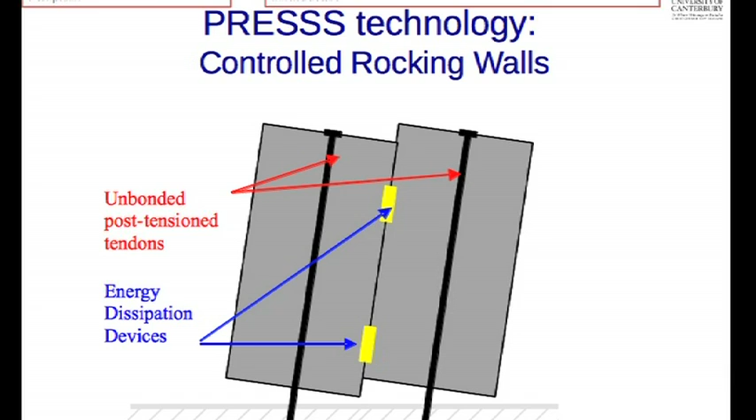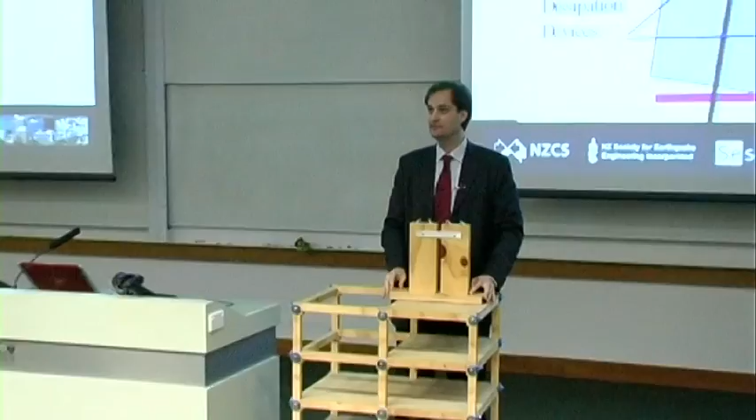The base isolation is one thing. The revolution of the Greek temples happens in a form like this. And to show you what it is, this is the Greek temple. Have you seen the walls in town? Have you seen how much damage they got as soon as something was trying to shake them? All over here? They don't need to be damaged now. They are using the Greek marble rocking technology, for which they move and then come back to the original position. No damage - you've seen the temple over there, 2,500 years. We don't have to convince you, do we?

What is the new way? They did not have steel. Now we do have steel. So we are putting a high-strength steel rod that we are using for construction, typically in pre-stressed concrete. This steel rod is going to be pulled and is holding such that I can decide when this is going to move.

So it's not going to be very floppy. I can tune it, pull it, and it's going to be very robust. But should the earthquake come bigger than what I designed it for, it's just going to rock with no damage. You cannot damage it.

And since you don't believe us, we have the equivalent solution. What I haven't told you is that these guys implemented the same technology. It's elements which are able to rock, and there's a rod going through, and if you were tying the rod, the more you tie it, the stiffer this becomes.

But if the earthquake comes very strong, you don't break it. It's marble, it's moving, it's not monolithic. You can't break something that is not connected in a monolithic way. So the revolution is the same thing. These are a little bit of a scale model we're using for teaching.

Humankind tried hard to redevelop this solution 2,500 years later, and it's being called LEGO. They managed to patent it because after 2,000 years, the patent from the Greeks expired. Luckily enough, they did not patent for construction. So this is free of charge for all of you, free of charge, it's in the public domain. You just ask, they might give you.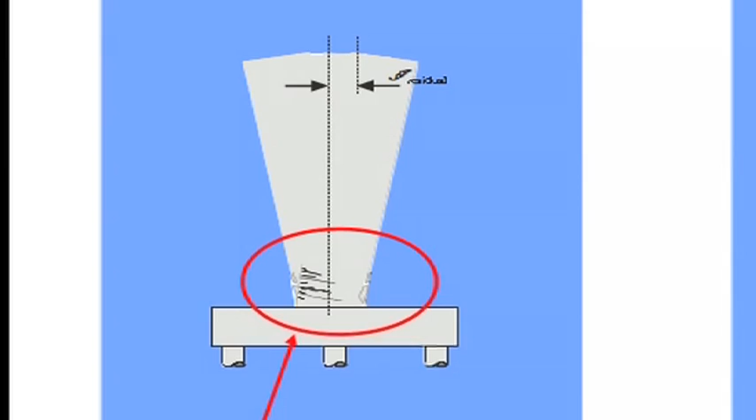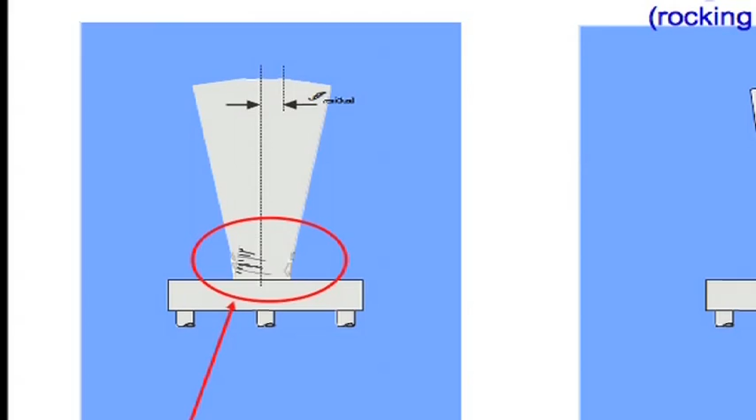Old ways, best old ways. You get an earthquake, you know this now, you do it, right? Damage accepted is in the code. That's the best that the code will tell you, so the minimum standard the code will tell you when you have a monolithic type of construction. This can be concrete, can be steel, can be timber, don't get it wrong. Plastic damage is going to be in the old material.

New generation of rocking temples. I can keep on going, can keep you here for hours. I love it. Now, in 1970, there was that major revolution saying, if we have plastic hinges in a proper place, we are going to avoid pancakes.

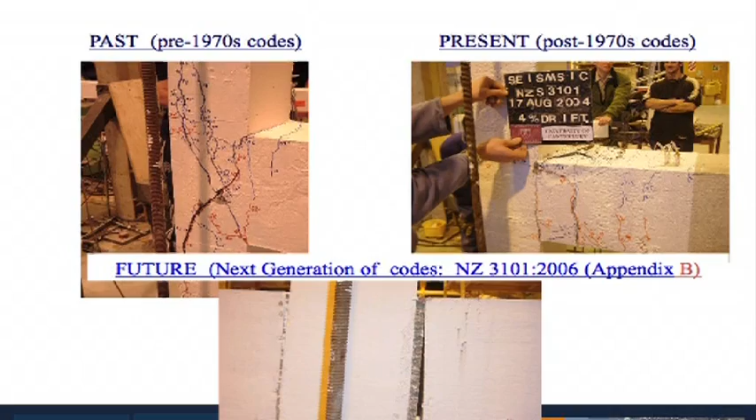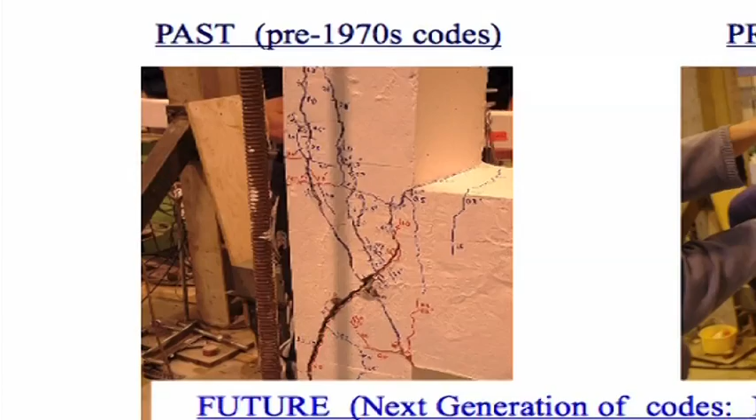So we did this type of experimental test, training our engineers. The only way is to have education everywhere. So we are training our engineers, our students, in looking at what happened if you were doing it the old way. Let me say in a different way: what happened if you do not strengthen an existing building, which is itself very vulnerable?

Who cares if the Building Act is not enforcing you to do so? Now you know it. It's not anymore. In Wellington, they are getting very scared. They are actually strengthening without waiting for changing the use. Now that you know it, you just do it.

Now, present is damage which is happening here in the plastic hinge. But it's damage, you are not happy about that. Not yet. The new generation is a revamping of these rocking elements, which are able to, instead of getting damage, just roll and rock back and forth, and after the earthquake, they come back to the original position. This is in the code, it's codified, it can be designed.

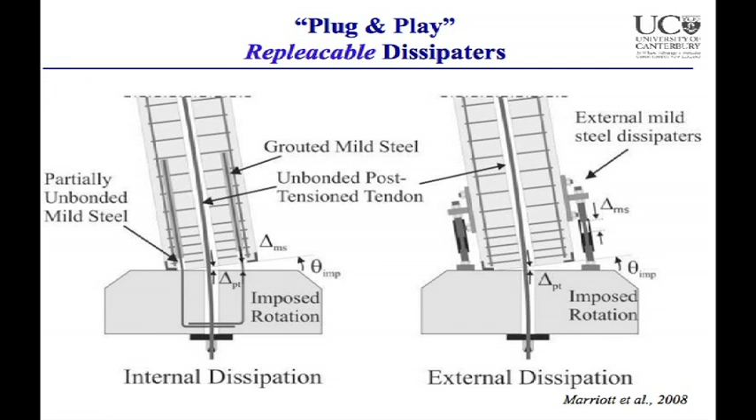What is the next level up? You can have fuses everywhere. Basically, imagine reinforced concrete, typically you have seen bars inside. Bars do not have to be inside anymore. We can have bars outside, and these bars are what we call fuses, dissipators, of any sort. That's it, we call it plug and play.

We've been developing them. You can plug them in and play. During construction, it's so simple to add them on. After an earthquake, if you damage them, you take them away. This is the earthquake engineer that we are pushing for. It's so simple and cheap, cost effective.

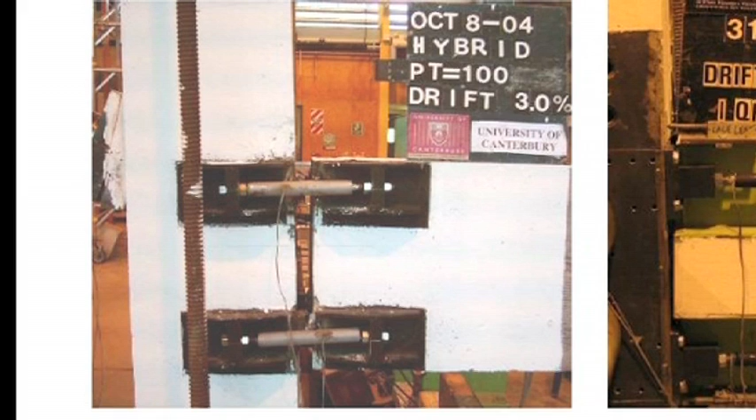That is absolutely unbelievable, and how simple it becomes. You see this plug and play between beam and columns? We've been testing all of this, and they don't get damaged. It's basically boring because you keep on going and nothing happens.

And when you publish something in literature, you're getting a review telling you, excuse me, can you actually show us the real experimental test, not the ideal one? That's actually the real one. So people don't trust you.

Big aftershock. In Countdown, there's going to be a new section, which is the seismic shop. You're going to go there, and there's going to be a 2x3 discounted, this called yielding device. But there's going to be also a viscous damper. Oh, a viscous damper, I always wanted to have one. I'm going to wait for the 40% discount.

Okay, now what do you know? I have to tell you, but again, it's a pity that I had the pleasure to be sitting on the plane when I was coming down with Gerry Brownlee.

It just happened. I told him, oh it's great, because now for 45 minutes I'm going to make you feel sick, not with the bumping. He's been very accommodating, because I told him the problem is that today I'm going to have a public lecture.

I'm going to tell them they can have the best technology, and a special subsidized discount from the government. Why not ask to have the new revolution of double glazing? We want that type of stuff, these new temples. How much does it cost? I don't know, but can you please enforce it like you did for the double glazing and the heat pump? I changed my heat pump too, and we'd like to have the same approach.

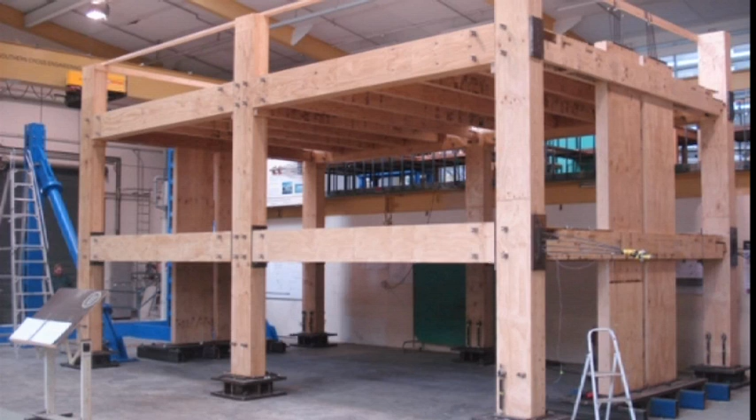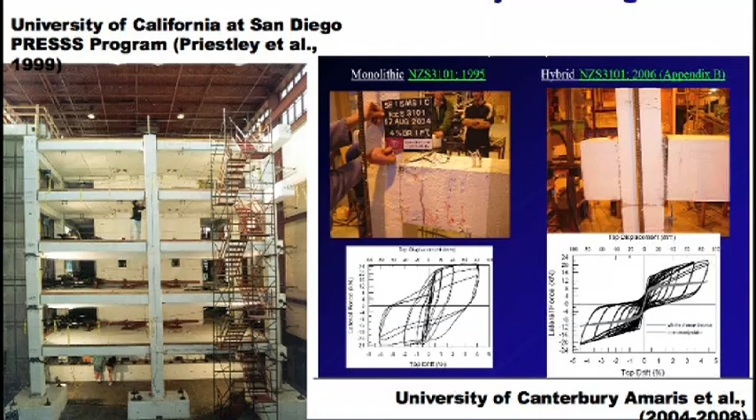This type of technology can be done in timber or concrete. We've been developing it in timber - these were toys we used, like any cathedral design in the world, people using a lignum wood model to show concrete. Then we thought, why don't we do it in timber? It did happen - we have buildings in timber using this technology. We've been testing that, and my colleague Professor Buchanan is going to speak about this tomorrow, using basically the same concept. You can use both materials. There's plenty of testing in the world to follow through.

Experimental testing, a significant one - there's a huge testing facility in San Diego at the University of California, San Diego, where Kiwi professor Nigel Priestley, a legacy from New Zealand, developed this new concept. Can you believe it, it's all about New Zealand legacy and you're not using it? Doesn't make sense. That tall guy was myself - not trying to jump down, but they were trying to show it was international. I told them it was a wrong political decision because I'm so tall the building looks small, but that building was huge.

Testing in the lab - what we're missing, to be honest, is that we do our testing at Canterbury University and don't have that big facility. So however hard we try, I was pleased to hear from the structural geotechnical class that the government is pushing for a new Earthquake Information and Research Center. After big earthquakes - 1994 in California, 1995 in Japan - there were big facilities built to test because you can't keep testing what we call toys. You have to test something similar but of a different, bigger size.

A 39-story building in San Francisco, which is basically like Wellington, is using this technology. Just to show you how big and how tall you can go.

Let me take a prejudice away from you. If you have a poor foundation because you're sitting on bad soil, we know that trees, the taller they are, the more they like to go down with roots. A tall building would naturally need piles, and it's easier to go down 40, 50 meters for a tall building than for a 5-story building, isn't it?

South America, Italy, we develop all of this. All of this exists around the world, and there's one reason the world is changing into this technology: cost. No company buys or develops something if they don't make money. So just believe there is a reason. And we managed to show that the costs are low even in New Zealand.

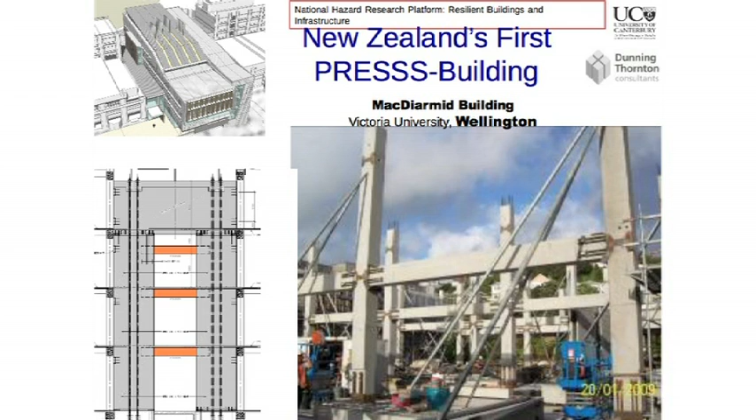Victoria University is using the brand new plug and play system, which is nothing else than what I showed you. We used in New Zealand just a few years ago the best version of this technology so far, which we're still developing. Then came the big earthquake test, because the second building was designed in Christchurch using a different type of this technology.

It cost less than the traditional solution. The client was Southern Cross Hospital. They were very happy for us to propose something new, as long as they didn't have to pay the risk and didn't have to pay the cost.

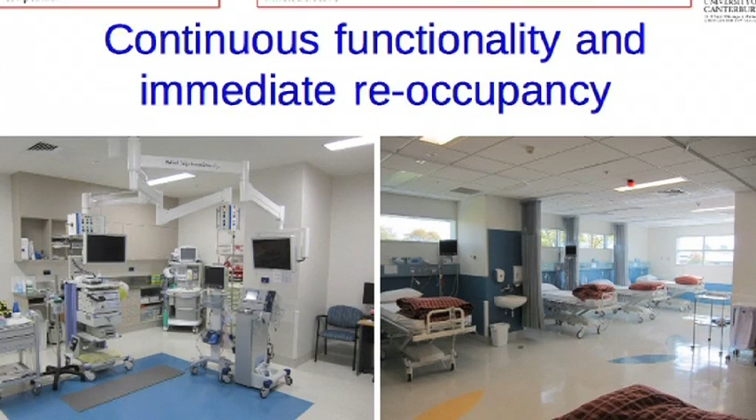So after the earthquake in September and after the earthquake in February, you go there, and that's the level of damage - there's a zoom so you can see it. It's part of the progress, as we call it, and that's what you get. That photo, interestingly, wasn't taken immediately after - you can see something moving, but it was operational immediately, basically used right after for major issues.

Now, how is it possible that this new technology costs less? Let me give the most obvious example, if I can find it. You would recognize it yourself.

You remember the first mobile phone from Motorola? How much did it cost compared to not the best one, but the generation behind it? Let me tell you clearly - it costs less.

Would any of you ever bring home a 1984 IBM desktop? I'm going to pay you to do that. You're going to say, are you an idiot? Sorry - I'm Italian, we don't do that. I'll say, no, I'm going to pay you $100, you bring it home, you use it for your work.

Now, if we believe that building technology has evolved not as fast as IT technology, but still pretty fast, why would you believe that something of this nature is going to cost more?

I'm finishing off here, and this is the last point, spot on time, no question and answer. Isn't this the good news you should be receiving? Now that you know these solutions are available, you can ask for them.